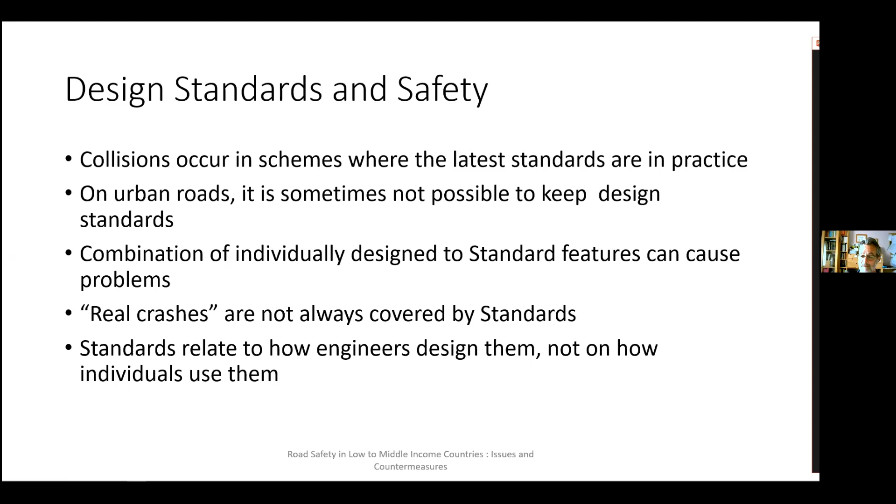Clearly, real crashes are not covered by the standards because people don't behave as the standards expect. Standards relate to how engineers design schemes, not how individuals use them. And again, audit concentrates on road user behaviour. It's done to ensure that highway schemes operate as safely as is practicable.

It would be nice to think that through safety audit, we could eliminate all collisions and all injuries. We probably could if we had an infinite budget, but we have to put in place remedies that are proportionate to the scale of the scheme being implemented, to minimize collision numbers and severity, considering the safety of all road users. And typically for new highway schemes that concentrate on improving the efficiency of vehicle movement, the majority of audit recommendations inevitably deal with non-motorized users and may be quite minor within the overall scope of the scheme.

The element that's often forgotten is that it is a circular process. Auditors learn from existing collision information what are the likely circumstances to cause collisions within existing designs. They look at new designs to say, can we improve that situation by making minor changes within the design?

Feed that back to the designers and the construction and maintenance staff so that we improve the quality of designs. Auditors are not there to criticize schemes, they're there to improve and assist designers, construction staff and maintenance staff in providing a safer and better road network.

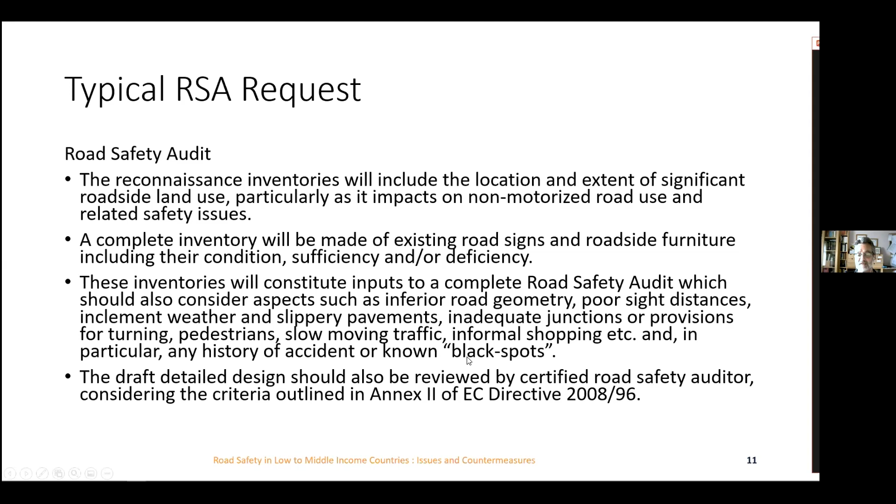Here's a typical road safety audit request included in an internationally funded major road scheme that looks at reconnaissance inventories, inventories of existing road signs, and various other elements to do with traffic movement. The only part of that which relates to undertaking an audit are those last two lines. The rest of this is information that the auditor needs supplied, not that the auditor goes and finds.

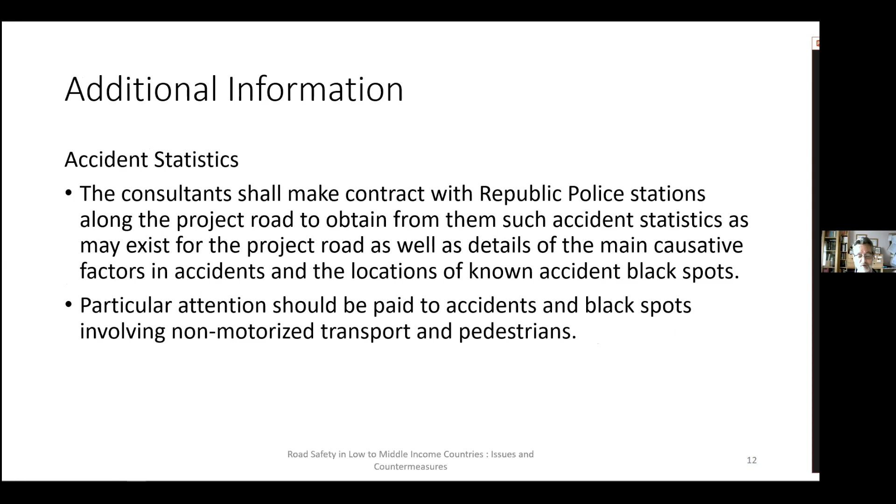Additional information refers to accident statistics, but these days they're crash and casualty statistics, so that they know the pattern of collisions happening on the existing network that the scheme will potentially address. A key element for auditors are the drawings, and inevitably the drawings are not sufficient. They give the core detail of what the scheme is going to improve, not necessarily the context of where the scheme is and what it needs to deliver.

How this road interacts with the surrounding area, where the local settlements are, where bus stops and pedestrian movements are, where schools are - that will have a major impact on road safety of all users in this area. That information needs to be provided to the auditor so that they can produce a comprehensive and detailed report that gives a brief description of the proposed scheme and the information.

Importantly, it identifies the stage of audit and the team membership. Was it detailed design? Was it preliminary design? Was it post-opening? The team members looked comprehensively at all the elements that were required, together with others who may have been present. Members of the design team can potentially make a contribution, together with the police.

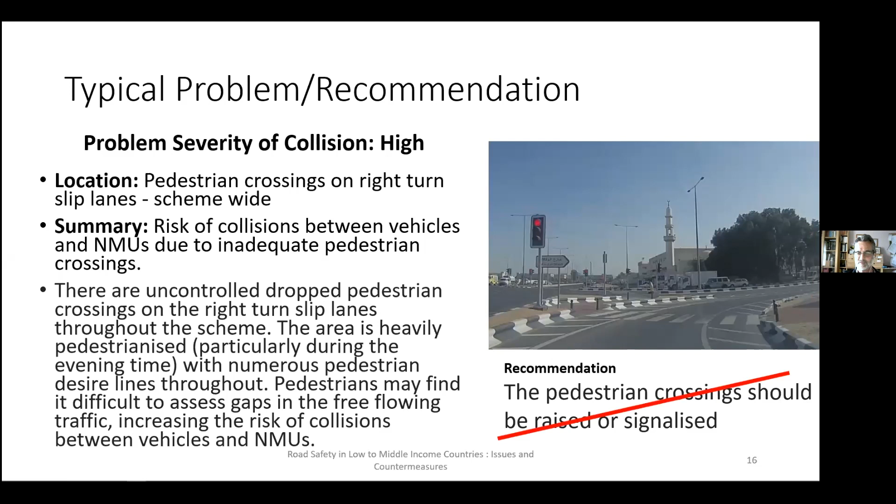Two issues with that. It's not one solution, it's two, and both solutions are design solutions. The key aspect here is the speed of approach and the likely conflict with pedestrians. The audit recommendation should be that the uncontrolled crossings be amended to provide a safe crossing opportunity for pedestrians.

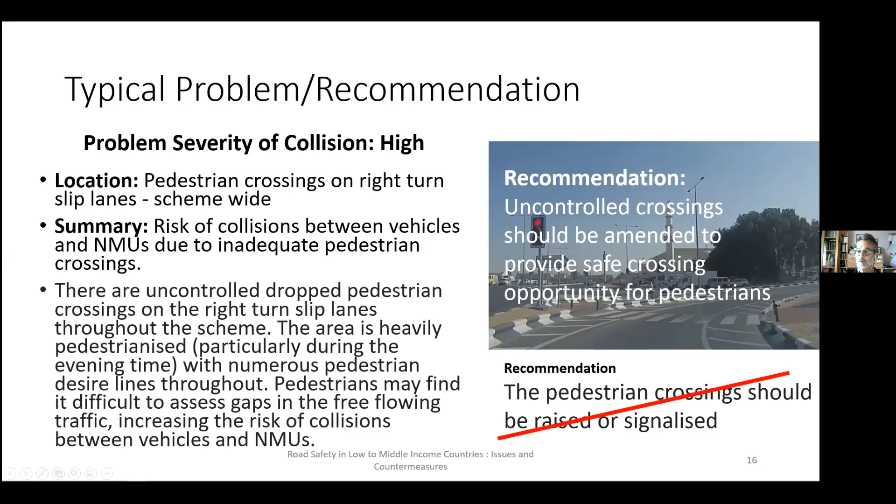Taking into account the speed of vehicles and the difficulty in assessing gaps in free-flowing traffic. How that is achieved is the designer's responsibility. The auditor merely points out this is an area of concern that needs to be looked at in detail in the design.

Once the recommendations have been produced, the design team and the client do not have to accept them. I'm quite happy for a designer or a client to say no, we're not going to do that, for whatever reason. Auditors only look at safety. They don't look at environmental considerations, scheme cost, land take, all the other things that the designer has to look at. If the ultimate decision is we can't do it because it will cost too much, that's fine.

But bear in mind that decision is signed off by the design team and by the road authority. The chairman or director of the road authority puts his signature on it and says it costs too much to save a life here. Now, I fully understand why they don't want to do that, but that's absolutely fine.

All the audit process is doing is identifying these situations and saying it is up to you to deal with it. How you deal with it is your decision, but it needs to be recorded and made public because it's your responsibility.

Auditors have the easy job. They have no responsibility ultimately.

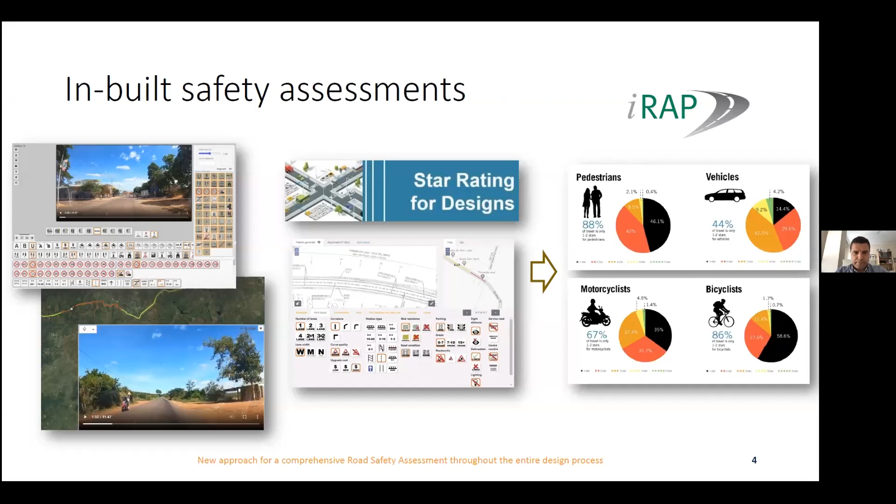But we don't only have these procedures. We have other elements or tools that we can use to improve the safety of a road. For example, we also have an important source of information from the road users' perception. It is really, really interesting to understand how road users interpret and understand the safety level of a road.

We can try to collect this information because it could be really useful, for example, to measure the level of road safety knowledge that road users have, and to understand their attitude and behavior, even if we can also make surveys or field observations. But asking them directly is also a really good way to build an important base of information that we can use later to define the best countermeasures, or before that, to understand which are the high risk sections and which are the main risks they are facing.

So according to this, it is really important to use this extra procedure in order to take these elements into consideration in our usual procedures and tools, like road safety audits or inspections. These opinions from road users will be really useful in order to translate them into engineering safety measures and into the design we are preparing.

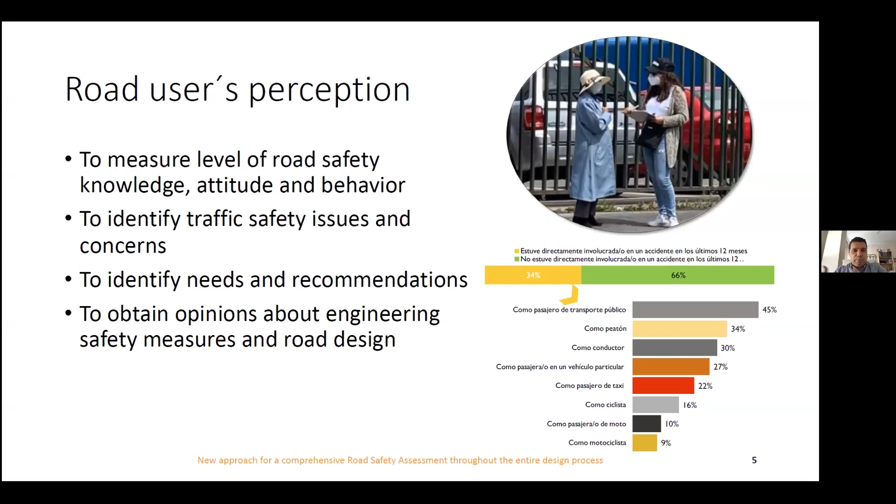But apart from that, we have other aspects where we can try to influence safety from the very beginning, and also in the last part before construction of a road. For example, we can make revisions of road design manuals and guidelines in order to upgrade them, taking into consideration different elements according to the new road safety approach, which now moves along the safe system—considering how to manage speeds and how to use traffic calming measures. With all these elements, we can improve and upgrade road design manuals, and then design roads with a better safety approach.

Apart from that, we can also make a revision of the technical standards. I know this is not exactly part of the road design procedure, but it could be a kind of base—if we have these upgraded manuals considering the safety point of view, it could be easier to get better road designs.

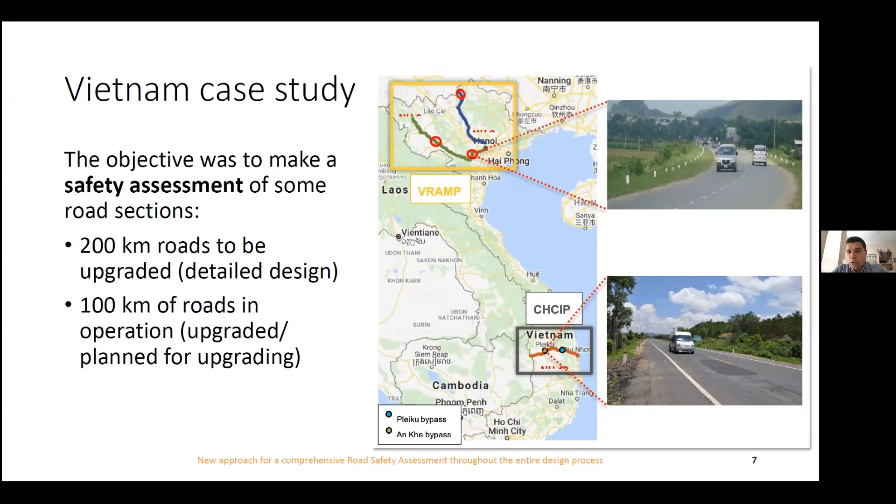The total length is around 300 kilometers, of which around 200 will be upgraded recently with World Bank financing. The rest of the road sections are already upgraded or will be planned for upgrading.

Next slide, please. So what we have done for this wide road safety assessment: here you have all the stages that we have followed for this assessment. We started with a gap analysis.

Gap analysis in the sense that when we arrived at this project, the government was preparing the detailed design of the different road sections in this National Highway 19.

But prior to the detailed design, there were different road safety assessments. There was, for example, an iRAP baseline, an assessment that shows the results of a baseline survey and provides information on the location of high-risk sites and some cost-effective countermeasures that can be considered later on. There were also some star rating reports that show the assessment of results based on the preliminary design, and provided advice on further treatments that could be considered to achieve a better level of safety.

There were also road safety audit reports on the preliminary design. So what we have done is take all this information, analyze it, and make a comparison of what they suggest for improving road safety, and compared this with the detailed design.

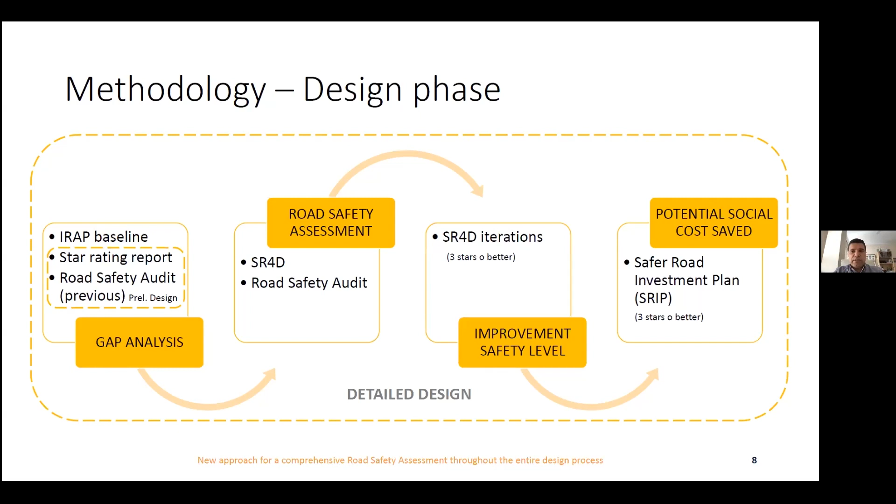Finally, with this, we achieved a specific safety level. We improved the safety level of the road considering these suggestions, these countermeasures. Then we carried out and prepared a safer road investment plan in order to understand the potential social cost that we can save with all these countermeasures that can be considered in the detailed design. Next slide, please.

As I told you, all the problems identified in the previous road safety assessment and the related recommendations suggested in the previous IRAP baseline analysis, star rating analysis, and road safety audit were revised by ourselves. For each of them, we checked if the proposed recommendations were implemented in the detailed design or not. You can see here in the upper side of the slide the comparison between the previous estimation and the previous level of safety. As you can see, we have an important percentage of red and black stars.

You can see that we jump from an important percentage of the length of road sections in color red and black, which is 1 and 2 stars, and then after considering the recommendations, we jump to 3 stars or more. You can see this for the different road users.

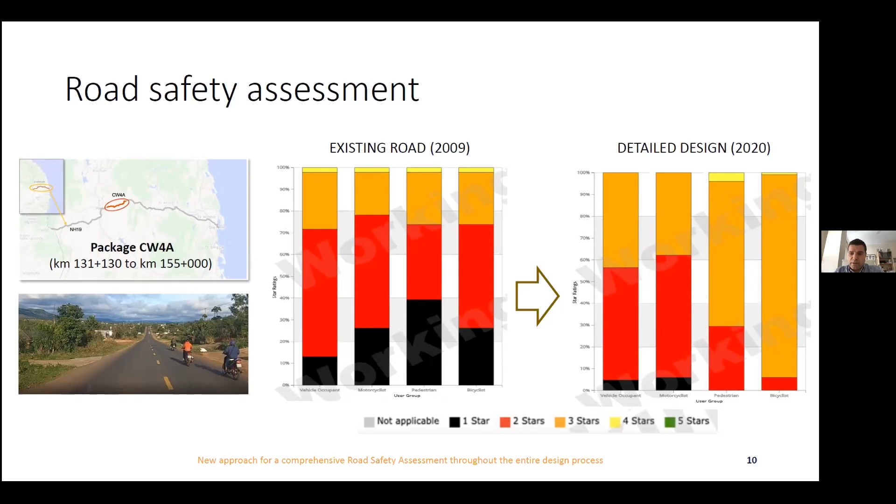According to the recommendations we will do, we will improve them for the detailed design. You can see that the existing road in 2009 has a lot of length of road with 1 and 2 stars, and then for the detailed design it has been improved. But on the right side you can see that the detailed design also has some important length of road sections with 1 and 2 stars, even though there is an increase.

According to this, as I mentioned before, we have made different iterations considering this tool, Star Rating for Design, in order to understand how to improve the safety of the road. We started with the baseline survey, then carried out a first iteration considering what we have in the preliminary design. According to this, we achieved a specific level of safety.

After that, we ran another iteration, a second iteration, considering the suggestions and countermeasures we suggested in the road safety audit. According to this, the detailed design has to be improved and upgraded to take these recommendations into consideration. Then with this, we will carry out a third iteration in order to achieve a specific or potential safety level that, as you know, according to the UN, we have to achieve at least 3 or more stars.

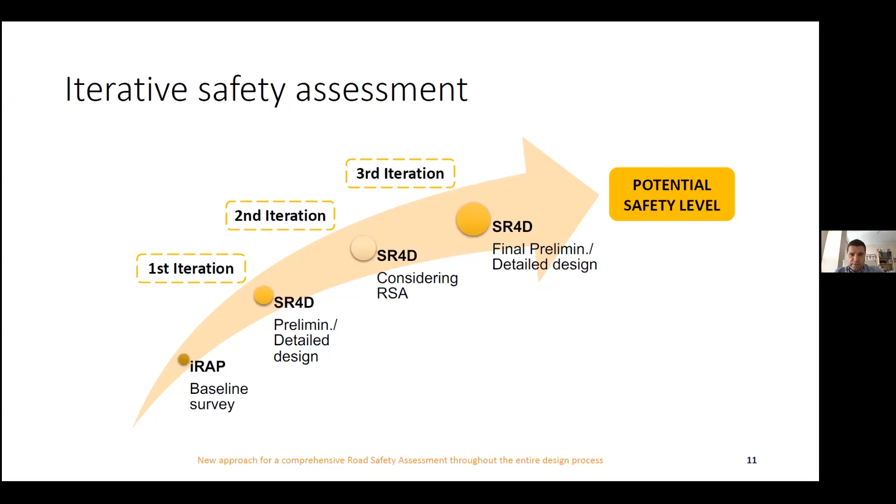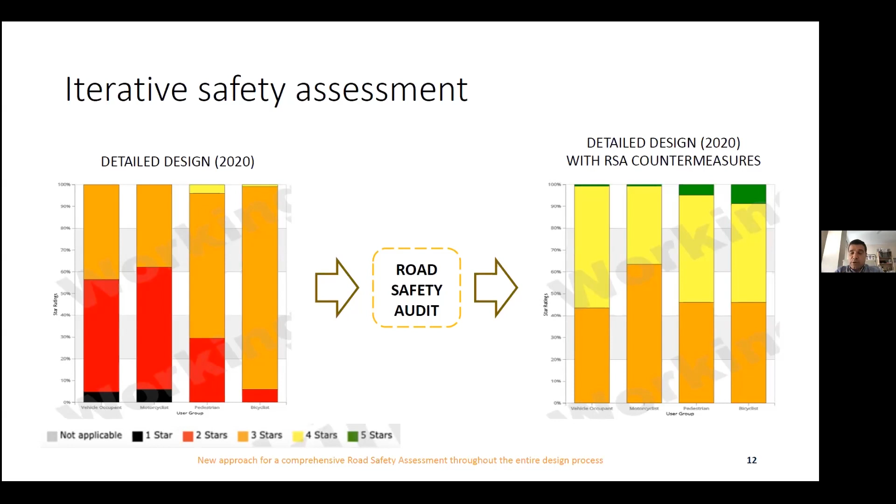This is something theoretical. In the end, these countermeasures and recommendations we give in the road safety audit have to be considered and implemented in the detailed design, and then in reality. So this is something we have to consider all along the design process. This is also really important: a road safety specialist, a road safety auditor, should be present at the different stages of the road design.

The application of the IRAP methodology in this case, along the various project phases, has made it possible to quantify the possible improvements in terms of star rating - in terms of improving road safety for all types of road users.

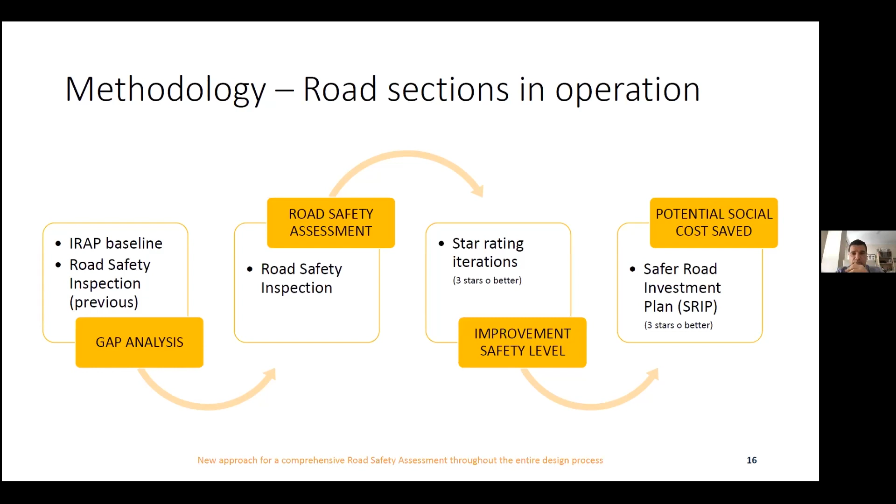Apart from that, we will also carry out a citizen engagement study. This study has been implemented, or will be implemented, in order to understand the perception of road users. These are the key elements we have considered. The approach is a cross-sectional approach where we have mixed quantitative and qualitative methodology.

So we implemented questionnaire surveys, we carried out in-depth interviews, and we organized focus group discussions. The locations were road sections with 1-2 stars for the four road users, crowded areas, and high-risk crossings in different types of environments.

The main participants were, of course, road users and other community members, but also local police, local transportation staff, and also school principals and school staff. This is really important because defining the main key stakeholders to focus on is key for this. And then, as I told you before, the tools we considered were questionnaires, interviews, and focus groups. Next slide, please.

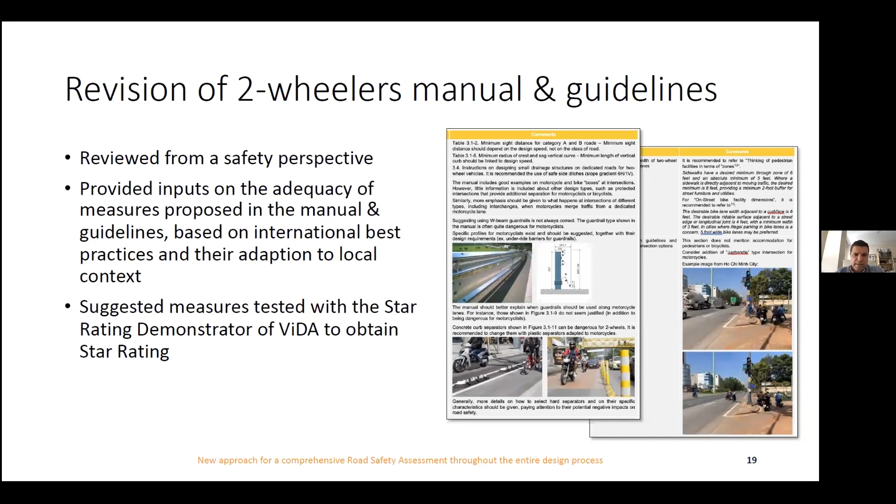Next slide, please. And that's all. Thank you very much.

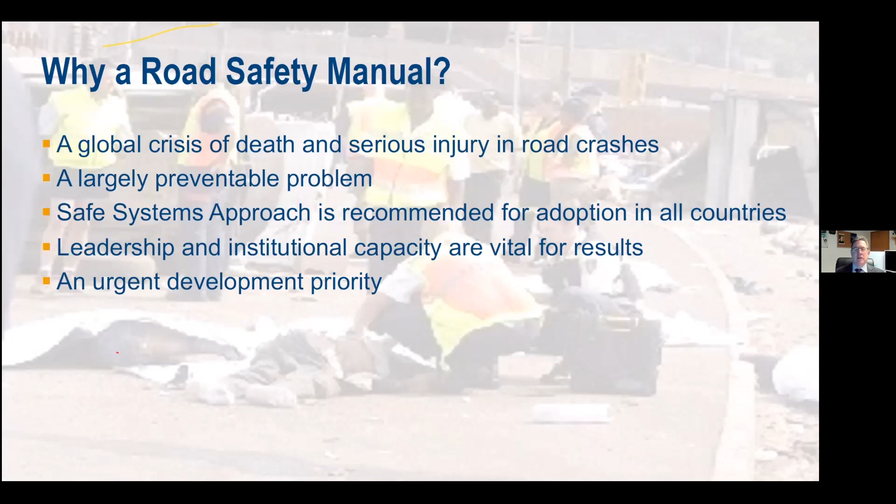So as I suggested, the road safety manual is based on the safe system approach. It shifts from crash prevention in general towards preventing deaths and injuries. What is it we can do proactively to address road safety?

It directly addresses the needs of vulnerable road users. In many countries, road users are treated differently. The vehicle may be predominant, so systems are built for the vehicle. But there are other road users, bicyclists, motorcyclists, and pedestrians out on the system. We need to address and adjust for those road users as we see them out on the road system.

It encourages safety to be designed into developing networks rather than as an afterthought. It is best to do things right from the beginning rather than wait to see how a road operates and then adjust for those issues. That's not going to work. That's the value of road safety audits. That's the value of being proactive in road safety.

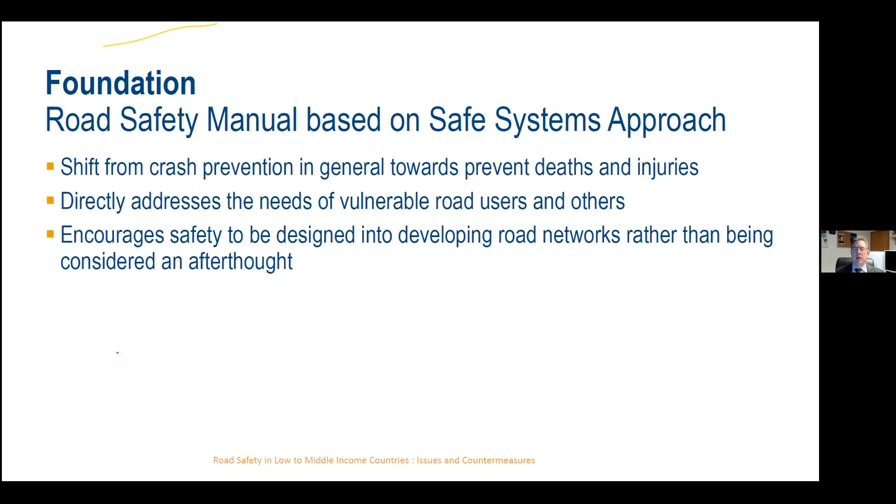The PIARC online manual is free of charge, and that's very important, I think, to many of us. There's 3 main parts, 12 chapters in total. The case studies and links provide detailed technical information and other references, so there's a lot of information. We've identified information we think is relevant and provide links to those. Each chapter and part can be downloaded and printed, and it's aligned with the pillars for the road safety decade of action.

Pillar 1, road safety management. Pillar 2, safer roads and mobility. And Pillar 3, safer road users.

The chapter organization is there for the reader. There's key messages for managers. To understand road safety, the practitioner often understands what they're doing, but management may not, so we have messages for management to assist. There are key principles for each topic, the specific things you need to know about each topic area, and discussion to explain those key principles.

There are case studies. We really worked hard last time, and we're continuing to work hard to provide case studies that show you how and why and where to apply road safety principles, along with links to technical material and other references. There's a lot of information in the document, and we try to make it accessible to you wherever it exists.

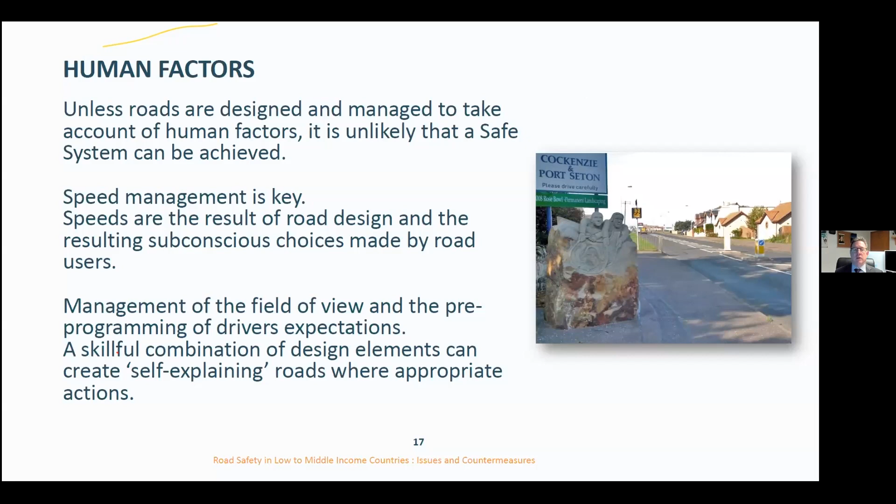As I suggested, infrastructure is a critical part of the road safety question. What are the improvements that we can do that can contribute substantially? So we've talked about countermeasures. What are those infrastructure countermeasures that we can put into place that are going to reduce fatal and serious crashes?

Standards, guidelines, and tools: how we go about understanding the system is very important as well, to be able to network screen, to select safety projects, to select the best safety projects to go out in priority order to determine what needs to be done on the road facility.

And we can do this in terms of demonstration projects. We're not always going to be able to do everything all at once. We can go out, make changes, see how those changes work, and then if they work well, implement them on a larger scale.

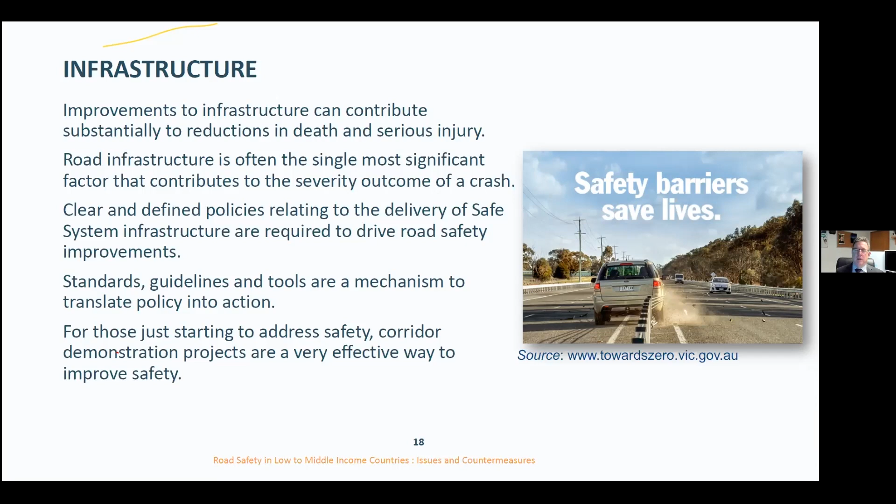Intervention, selection, and prioritization. I put this slide in there because it's critically important. If you're going to be most effective in road safety, you have to select the right projects. You have to be able to understand and address the risk. That's why we use tools like iRAP and other tools, for instance the Highway Safety Manual in the US, and many other tools in different countries where they're looking at road safety, trying to address that from proactive tools and going out there and making modifications.

Interventions are there to address contributing factors. I can't overemphasize contributing factors. Go out, understand what is happening, and address those contributing factors to be most effective. Detailed information is available on the intervention and use, including those for low and middle income countries. And that is one effort that today the TC3.1 is undertaking: proven countermeasures. We want to get that information out to you to help you understand what we're seeing as effective.

Economic assessment is also very important, being able again to prioritize projects in priority order to get the best return on investment for the funds that we are spending. Next slide.

Once we've chosen to do a project, we need to monitor, analyze, and evaluate those projects. Again, the idea is that what we're trying to achieve is continued improvement overall. Monitoring, seeing what's happening, analyzing to understand the individual parts, and evaluating and comparing what you're doing from location to location, so that you can improve those systems.

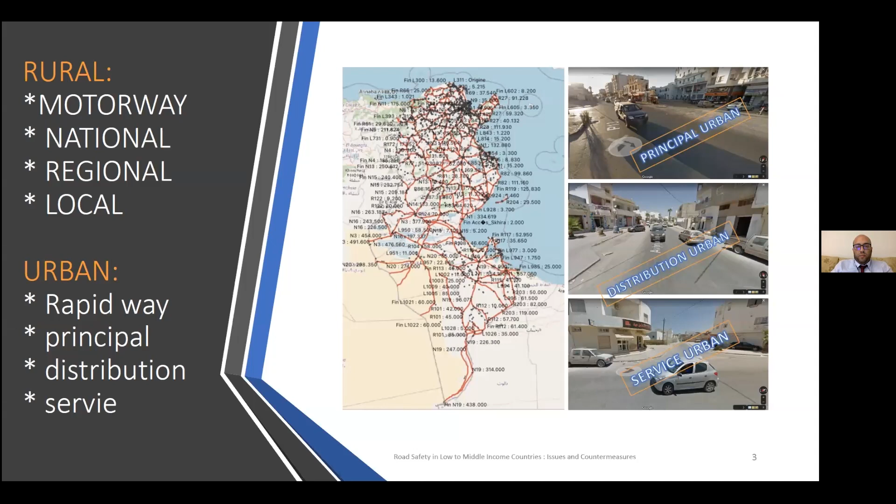On the next slide, I've shown the distribution of crashes over the Tunisian national roads. As part of the TunRAP project we were discussing yesterday, we were able to map two key elements from these crash maps. So on the next slide, you have two maps.

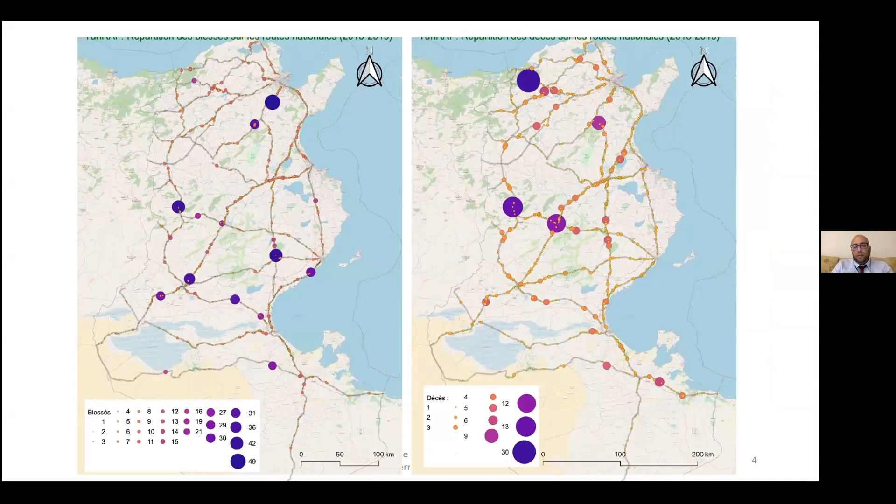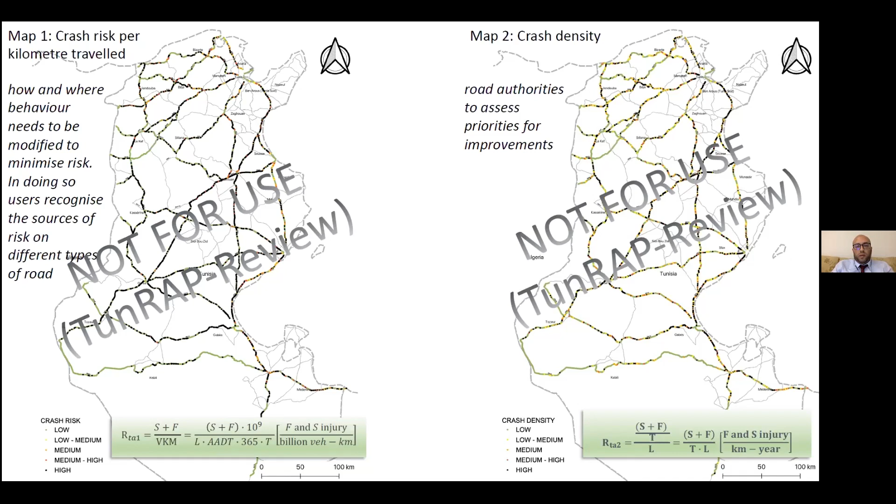In Tunisia, as well as Northern and Western Africa, road design is based on a very rich archive of guidelines—mainly French guides, used across most countries in this part of the continent. I've chosen the most important ones for road design, intersections, roundabouts, interchanges, and bypasses. Behind these documents are hundreds of other guides about road safety, urban area roads, roadsides, safety barriers, and so on.

When reading these technical design guides, you'll see there's a huge amount of recommendations—so much that any designer, even with long and strong experience, wouldn't be able to answer all the questions or account for all the safety aspects, especially when dealing with many projects at the same time. In fact, as shown on the next slide, we definitely need checklists.

We use, in Tunisia and in most of our projects, the checklist of the French Service of Technical Studies for Road and Motorways. We also started using the PIARC checklists, which are quite rich and contain many recommendations to check the design and be sure we're accounting for all safety issues, starting from preliminary design, detailed design, and construction design. There you'll find more than 200 questions to account for road safety in your project, which is impossible to keep in mind and which aren't systematically counted in commercial design software. So there's really no other way to check the design apart from these tools and checklists.

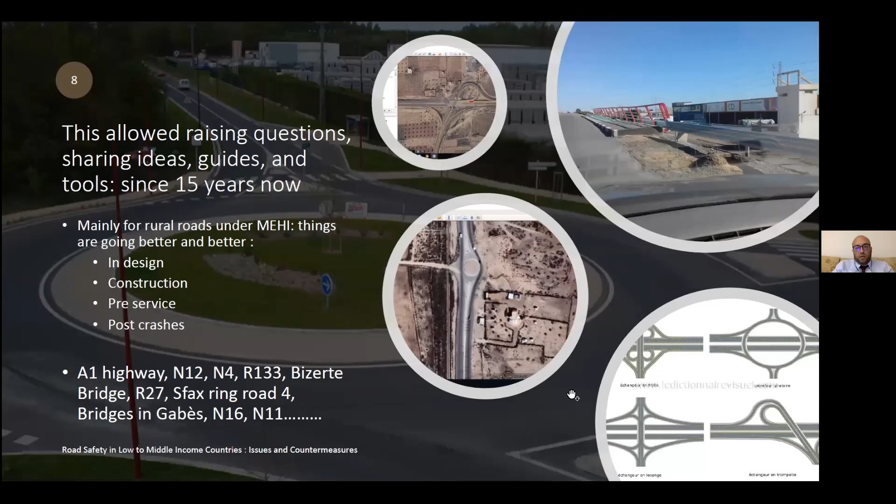So the designer now correctly checks visibility, which wasn't accounted for in all projects before—it was only systematic for some major roads or motorways. This also allowed accounting for good visibility for overtaking, good visibility on curve entries and intersections, and ensuring these are greater than stopping distance when necessary.

Our colleagues and designers also started checking curve sequences, which wasn't systematically accounted for before—the distance between curves depending on their sign, and coordination between horizontal and vertical alignment. All of this has come into the design correctly after using these checklists, based on our experience in Tunisia over the last, say, 15 years.

They also check roundabout deflection, which wasn't systematically accounted for before. They check vehicle movements and paths on the drafts to avoid unsafe measures. They also account for vulnerable users in rapid urban ways, as well as clear zone treatment. Roadside hazards and equipment are improving, and new projects make use, for example, of European Standard 1317 to define barriers and their ends. But I think this should be adopted in all projects, not just pilot ones. This is a challenge for coming projects, especially the corridors currently in the design process.

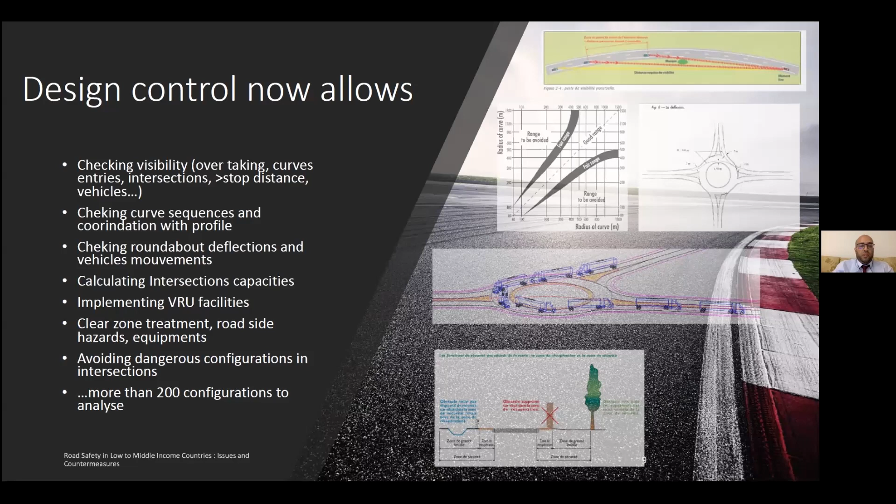Meanwhile, when we look into the crash database, we unfortunately see that over the period 2015 to 2019, fatal and serious injuries were around 11,000 on rural roads, while more than 22,000—double that—were on urban roads. So it's two-thirds on urban roads. This is a big challenge for us.

We need to focus more and more on urban areas, where there's a lack of funds and sustainable resources to account for road safety. The municipalities in charge of designing, constructing, and maintaining streets suffer from lack of experience and global leadership at the national scale. We need to revise our development plans, adopt safety engineering facilities, and convince them of their effectiveness and importance in their respective regions. We'll also need to convince them that streets must be shared with vulnerable road users, and to avoid constructing rural-style streets only for vehicles.

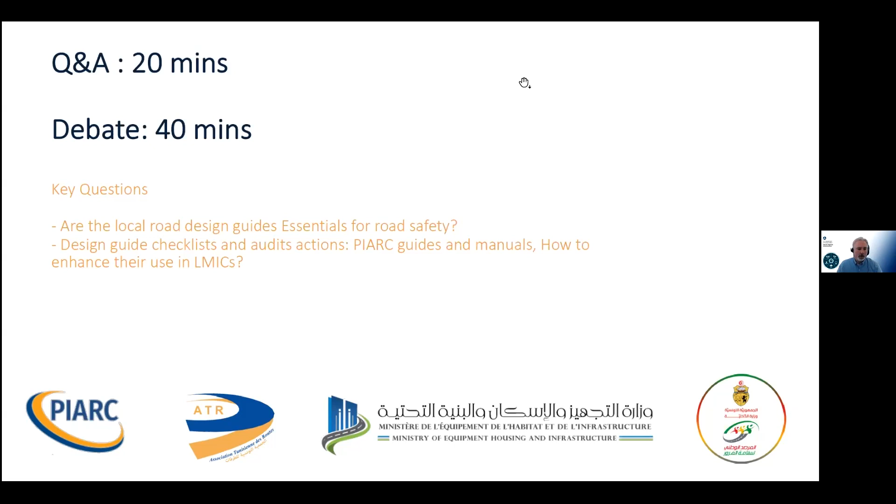The next question I would like to pose to Francisco. Francisco, this question came in from Nuria, who asks: in general, when a new road is being designed and I want to apply a safe design, is there any rule or parameter with which I can estimate the social benefits of increased safety in a monetary way? In the case of reduction of injured and deceased, I have, for example, the IRAP rule of thumb as approximately 70 times GDP per capita for a deceased. So any advice that you can give to Nuria for new road assessments?

For new road assessments, there could be two possibilities. One is that we find a greenfield road, where the road is designed in an area where there was no previous road. So this is something completely new. In that case, we just focus on the design. There is no other element we can take into consideration, just the design and the environment that we will find, in order to understand which different trips we can find in this area, in this section.

But if it is a road that is a rehabilitation or an upgrade of an existing road, then we will have some more information. It's possible to have information in terms of the road crashes that have occurred in the existing road section, and this is a really important source of information, because analysis of this can give us a lot of hints that we can use.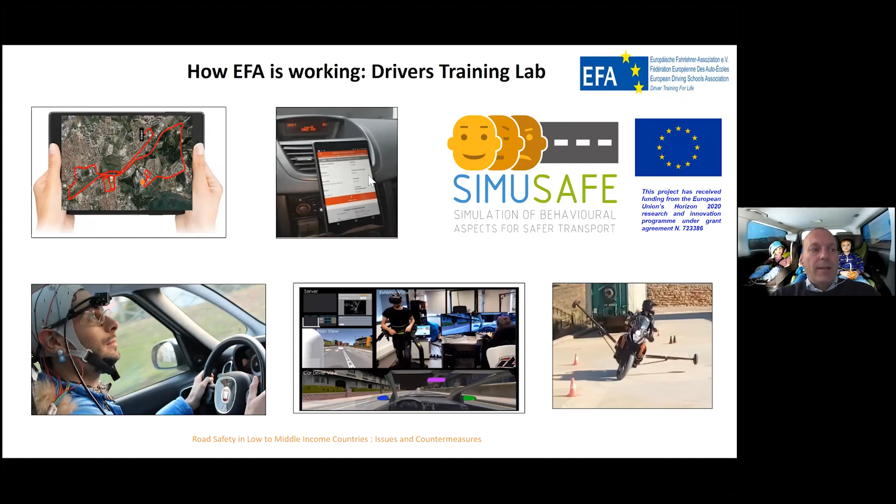So in situations where across Europe it's very complicated to reproduce all year round, we are doing lobbying activities at DG Move. DG Move is the Ministry of Transport of the European Commission, so we are working a lot there.

And we are also invited to do the UNECE road safety global events. One of the things that we are presenting and supporting, as already mentioned in our publications and in our metrics, is the need to update the training curriculum to match the market and society's needs.

For instance, we have a very high limitation because currently in some countries it's not allowed to use ADAS during the exams. This means the instructors don't use, don't buy, or disable the ADAS during training, because the students aren't interested in it, just because during the exam the candidates are not evaluated on these devices.

One of the things that we are defining is a new role as a road safety expert — a person who will be able to work as an examiner or as a driving instructor. This is based on the concept of a university, so we have a central curriculum. 75% of the study of the training course that the person has to do is the same, whether he wants to become a driving instructor or an examiner. The remaining 25% will be specific topics on becoming a driving instructor or becoming an examiner.

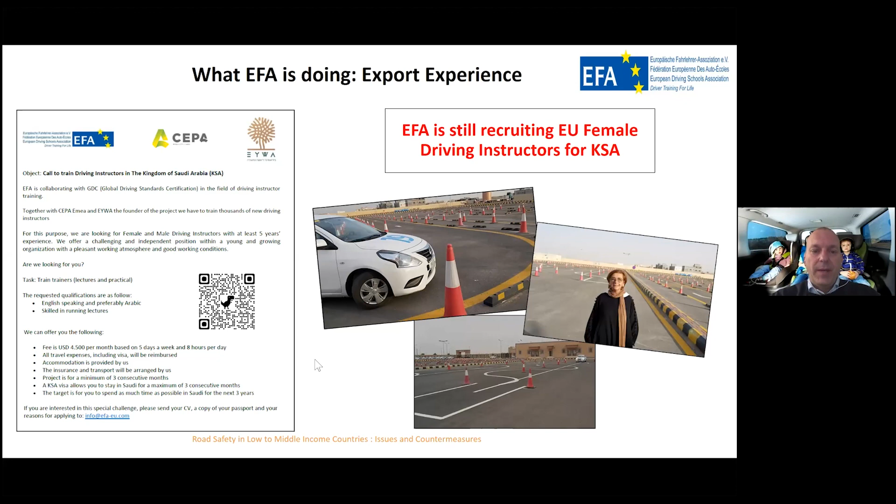A few weeks ago, we started a new cooperation with the Kenyan Boda Boda Association. Boda Boda are motorcyclists, riders, more than 1 million people working on the road delivering goods and passengers, and we would like to understand how we can participate and share knowledge and improve our skills together. We will update you soon. I guess before the end of the year we will collect interesting results.

We are starting as well some cooperation in Africa with Nigeria and Togo. So summarizing, we believe that technology is profoundly changing the way we work, and we are committed to ensuring that the laws align with the needs of society and the economic market, respecting the environment.

In Europe, around 80% of drivers obtained their license at least 20 years ago. The roads have changed, the vehicles are changing, only the driver struggles to change. Quality private training must accompany this challenge. Technology can help us improve the quality of training, especially in low and middle income countries where limited economic resources have been a problem for the dissemination of quality driving training.

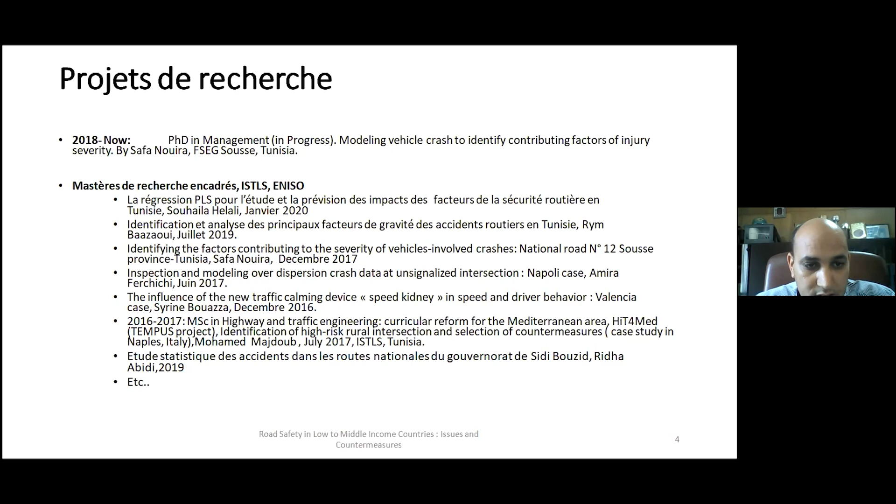Another project: identification of high-risk rural intersections and selection of countermeasures. This is in Naples, Italy, and several other research projects.

Now, the objectives of the research work are to identify black spots in accidents, to undertake a diagnosis and inspection of black spots on the route network, identify the main factors of serious road accidents in Tunisia, specify the correlations amongst them, foresee the impact of the main factors on the frequency and seriousness of accidents in Tunisia, and provide countermeasures to improve road safety.

The risk factors: human factors include gender, driver's age, speed, use of alcohol, driver's experience, etc. Then vehicle risk factors: the vehicle age, the type of vehicle, the number of vehicles involved in the crash.

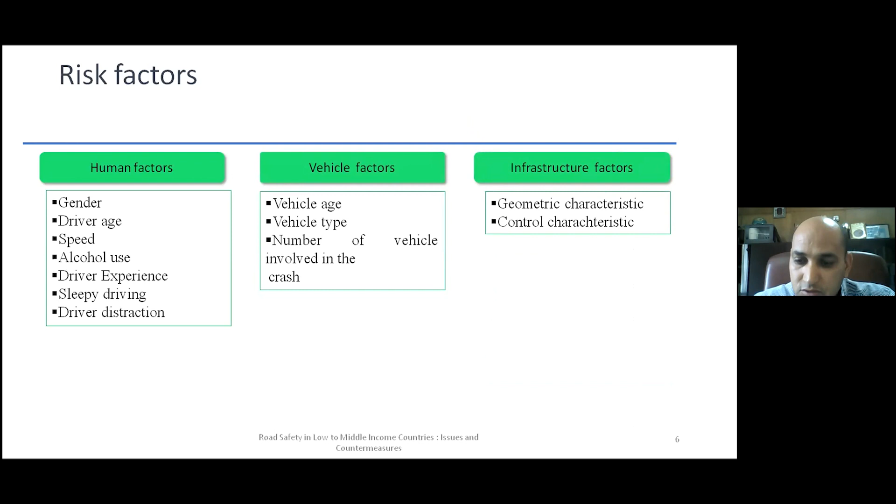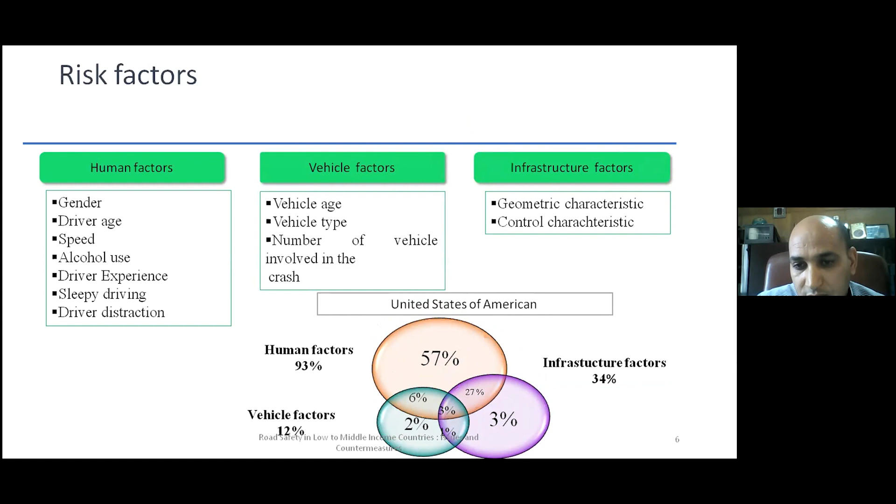We also have infrastructure factors, which are geometric characteristics and control characteristics. For instance, in the United States, the main factors in accidents are human factors, infrastructure factors, and vehicle factors. Essentially, it's the same picture in different countries.

Environmental factors include weather conditions, the season, road surface condition, and lighting/street lighting conditions. Then temporal factors: time of day, as well as the day of the week, etc.

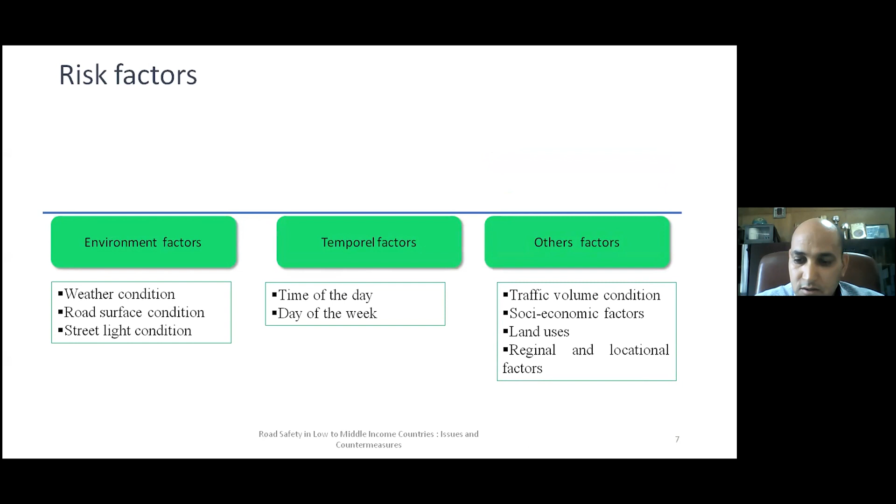Other factors include socioeconomic factors, traffic volume conditions, regional factors and local factors, etc.

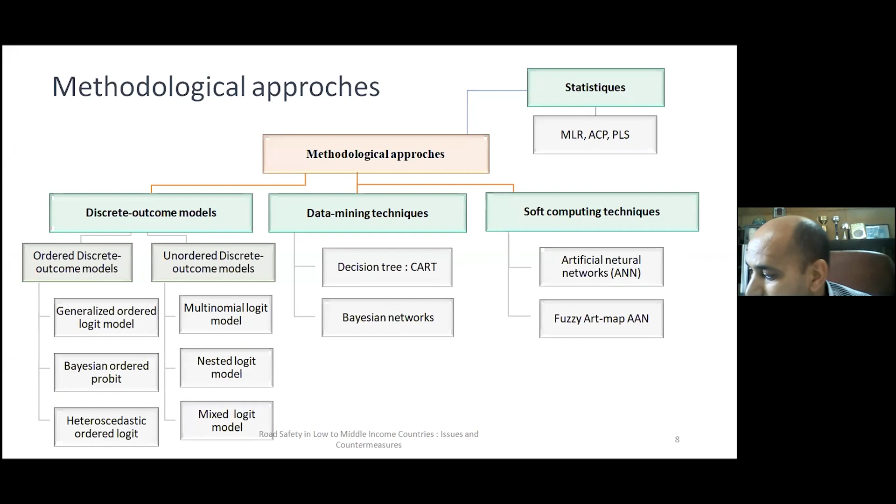The methods used are essentially the methods that you have before you: soft computing methods, and also statistical methods such as multilinear regression, for instance. This is one of the main components, either PLS or regression, etc.

I would begin with the first project: a PLS regression for the study and prediction of the impacts of factors on Tunisian road safety. This is to identify the main factors of road safety in Tunisia and to foresee the impact of these factors on frequency and seriousness of accidents in Tunisia.

This was undertaken in 2019. For instance, the statistics on accidents over 8 years from 2010 to 2017 show the major factors are human factors: driver's distraction representing 50%, speed 46%, and other linked factors 33%. Among factors related to the vehicle: 33% light vehicles, 18% motorcycles, 14% light trucks, and 20% pedestrians.

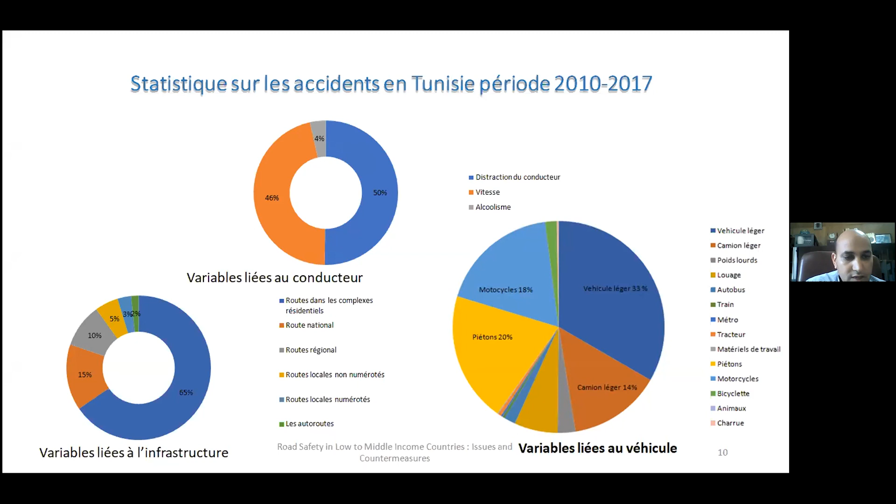This is mainly 65%, and this is 15% and 10% for the local roads. This is the variables, the classification of variables in the software used in the PLS regression method.

We also use the impact of different factors: global factors, the human factor, the vehicle factor, the road factor, etc. There is a very significant relationship with the number of accidents, the Y response, which is very well explained by the different factors.

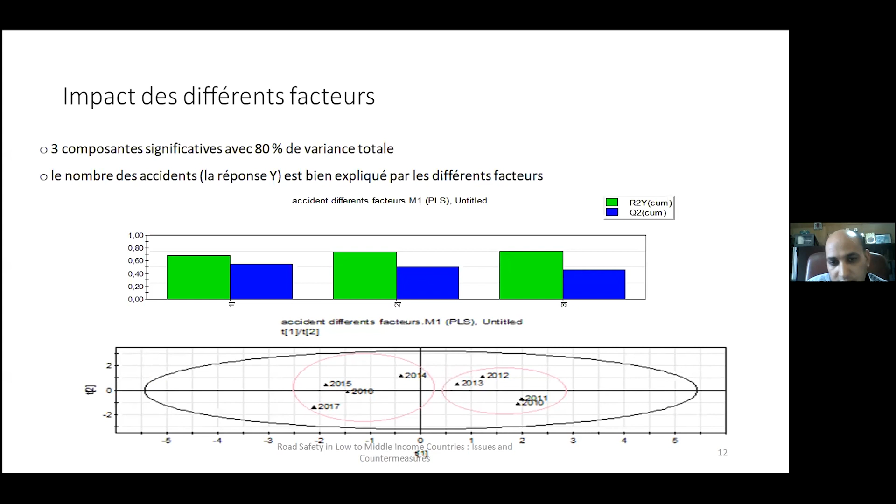It's very similar in 2012, 2013, and from 2015 to 2017, you can see them. We are showing the main factors: the passenger factor, the passenger vehicle, the factor vehicles, and this also has to do with the list in the police database.

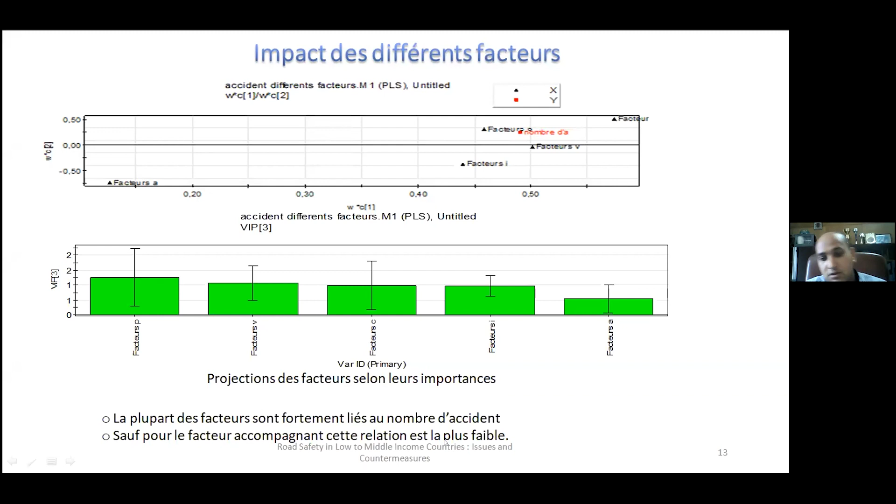Sometimes the police tend to eliminate the cause of the accident, and the majority of the factors are linked to the number of accidents, except for that. For prevention of the number of accidents, you see the number of passengers, vehicles, and the driver.

There is a certain agreement, a concurrence between these two, since between 2010 and 2012 there was a big difference in the number of accidents. This is because of the prevention actions.

This is what we have to do: include the factor of economic growth. This is economic, demographic, etc.

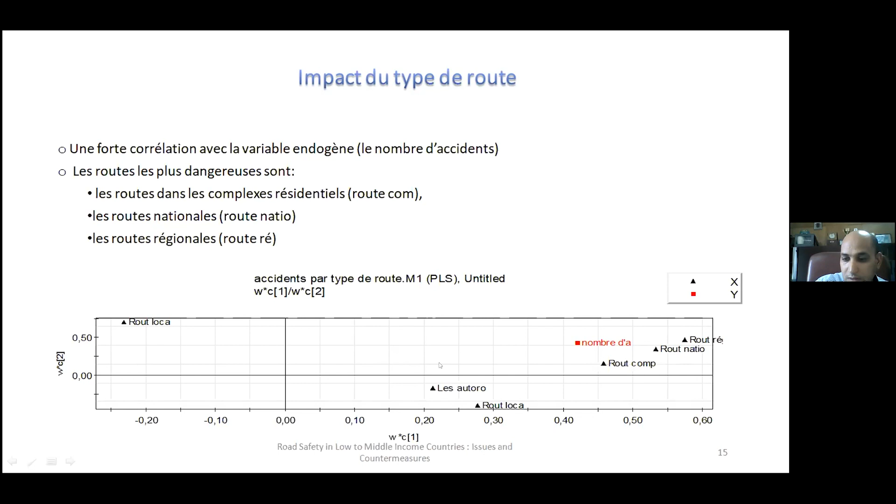We saw what the impact of the type of road was. You see the residential roads, the national roads, and the regional roads. There is a big relationship with the variables, as you can see in this graph.

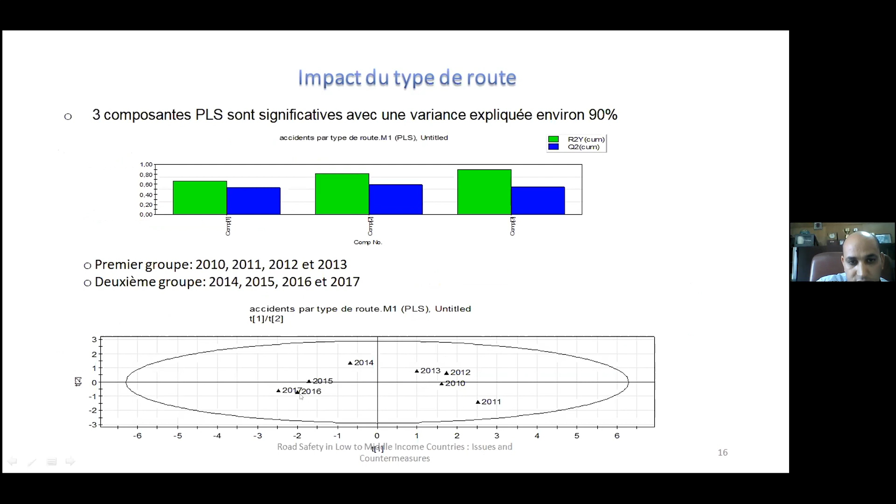The same applies in the years 2014 to 2017; we have the same joining of the figures here. Agglomeration.

This is present in the kind of vehicle. You see the light vehicles, the buses, the light buses or trucks, and the heavy vehicles.

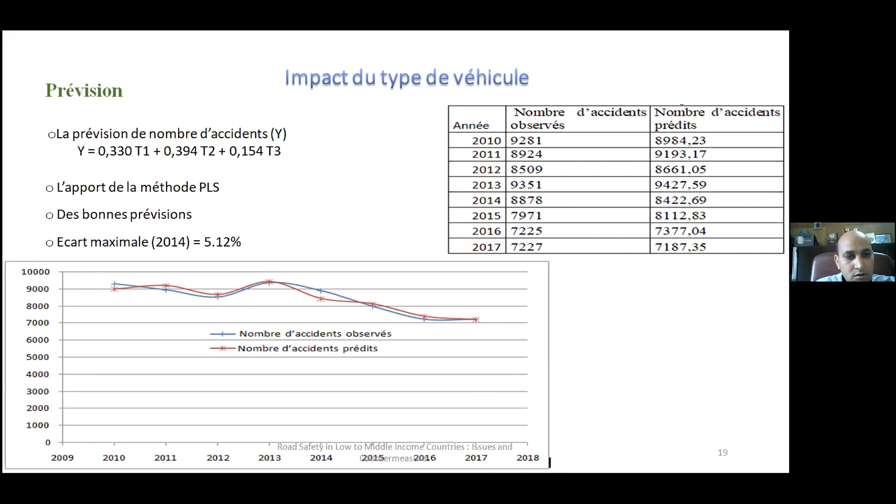This is a prediction measure, and this is how we measure it. We will look into the different impact of the month, the week, or the time of day in which the death occurred. We want to look at the efficiency of these measures by examining the different factors.

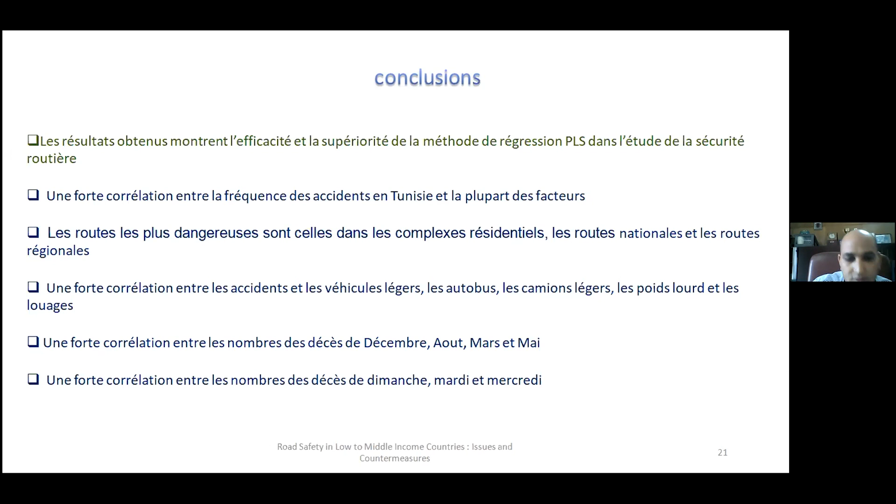The roads are more dangerous in residential areas, then national roads, then regional roads. There is a certain correlation in the months of December, August, March, and May. The number of deaths is higher during the weekend and on Wednesday.

So what would be our recommendations? We have to improve the infrastructure. We have to improve the quality of the road surface in relation to the amount of traffic. We have to improve the signals on the roads that are most dangerous.

The drivers and passengers in the vehicles need to use the safety belt, the seat belt. That's the second part of this project.

Do I have to continue in French? If you want to speak in English, you change your channel. You cannot change the language when we are sharing the screen. No, I will continue in French. If you want, we can wait five minutes.

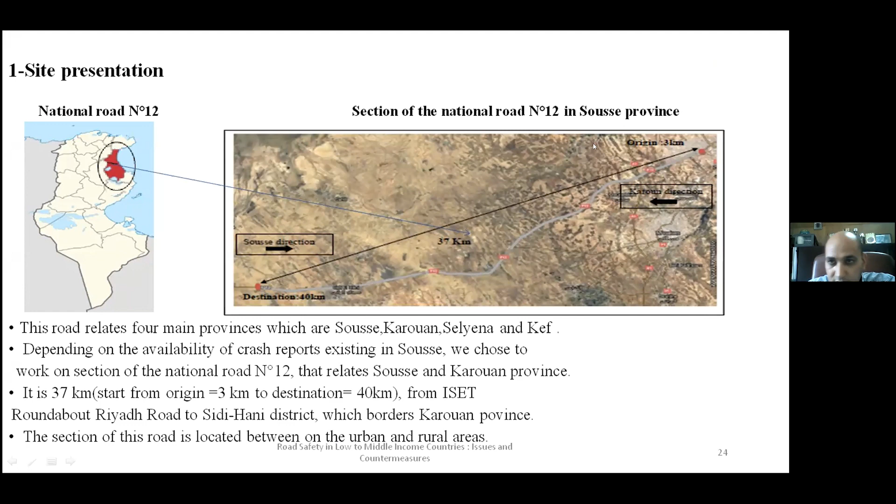The road, this is in this part of the Sousse province. It is urban, and the other part is in this area, rural.

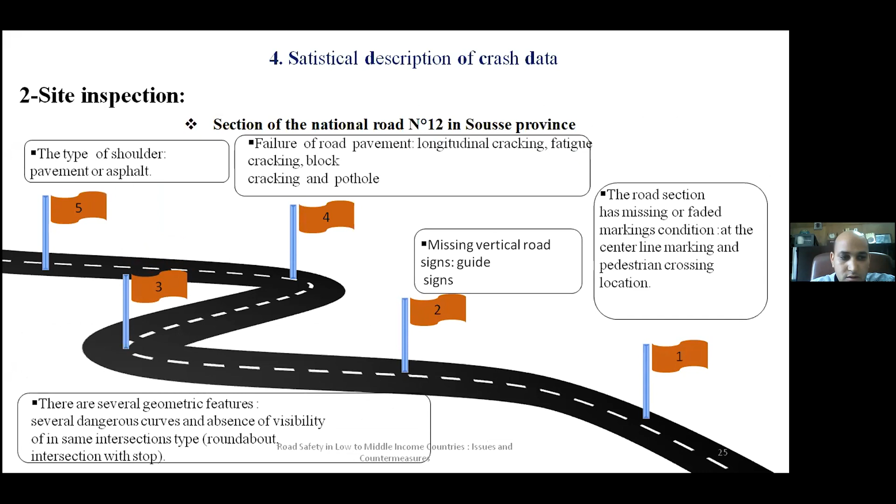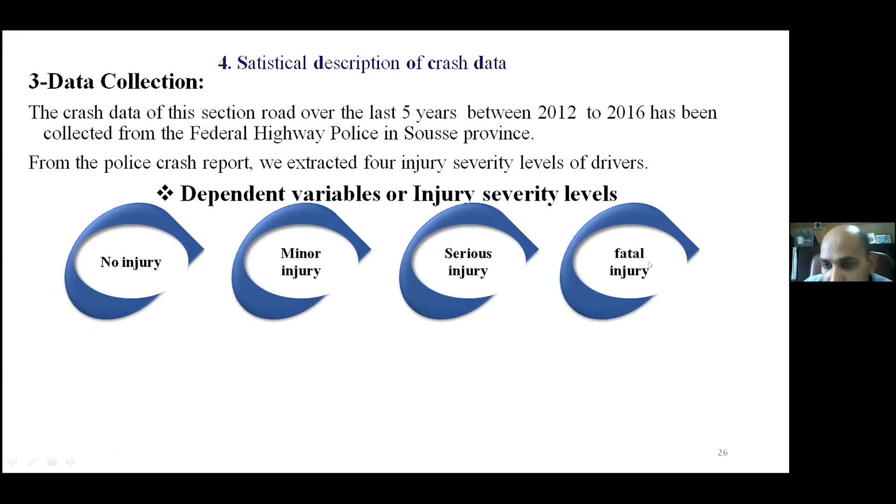And then we have the different factors for severity: minor injury, no injury, serious injury, and fatal injury.

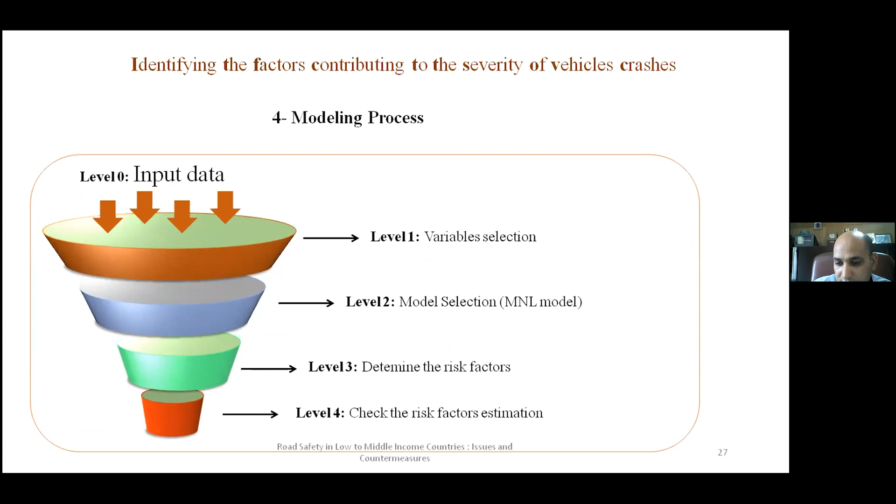This is the method with four levels or stages: variable selection, model selection, the MNL model, and then determination of the risk factors, to have a checklist of these determining factors. These are the main risk factors.

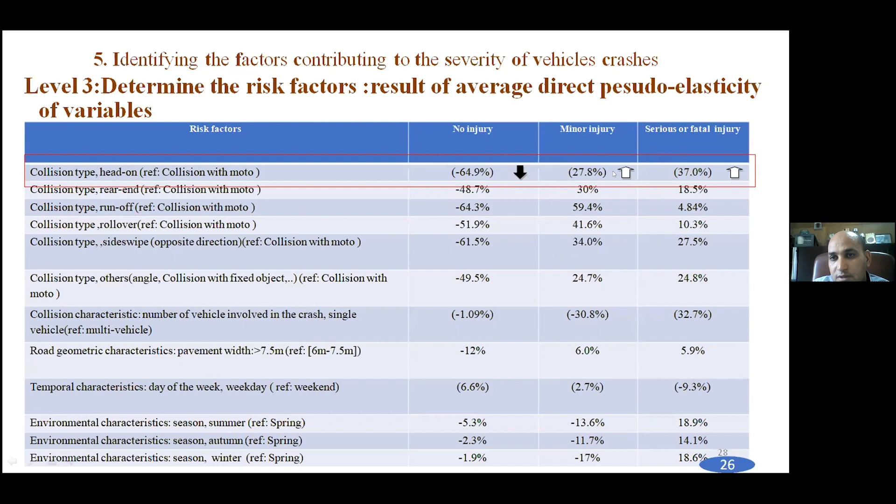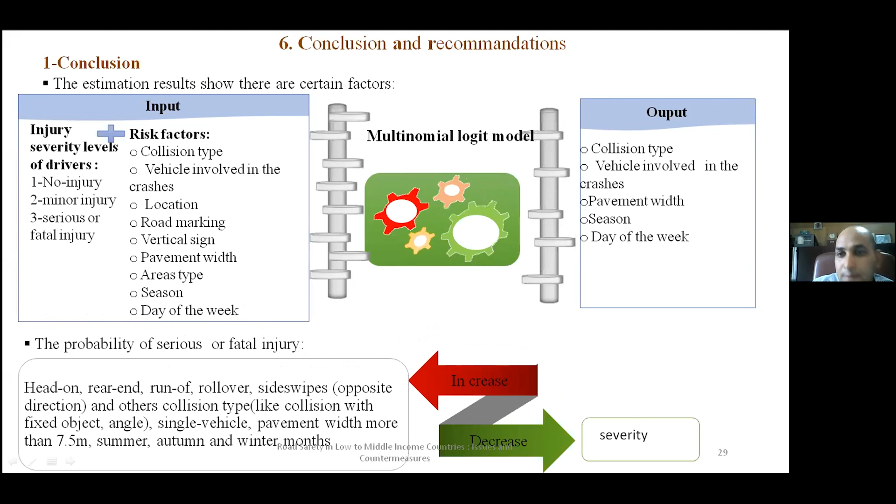As a conclusion, from the different checklists, we can choose the factors that have had a serious impact. We can have a short list of these factors as a conclusion.

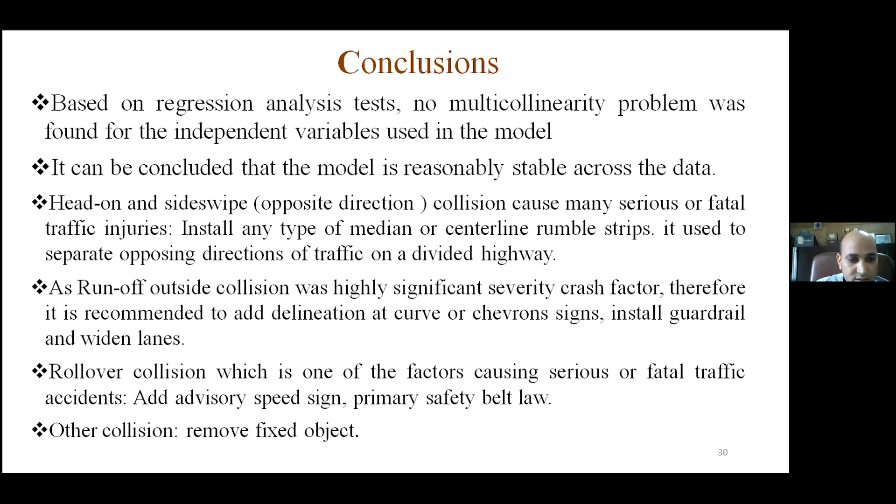This is based on regression analysis tests, with no multi-collinearity problem. This depends on the type of collision, and then we can see the severity of the collision.

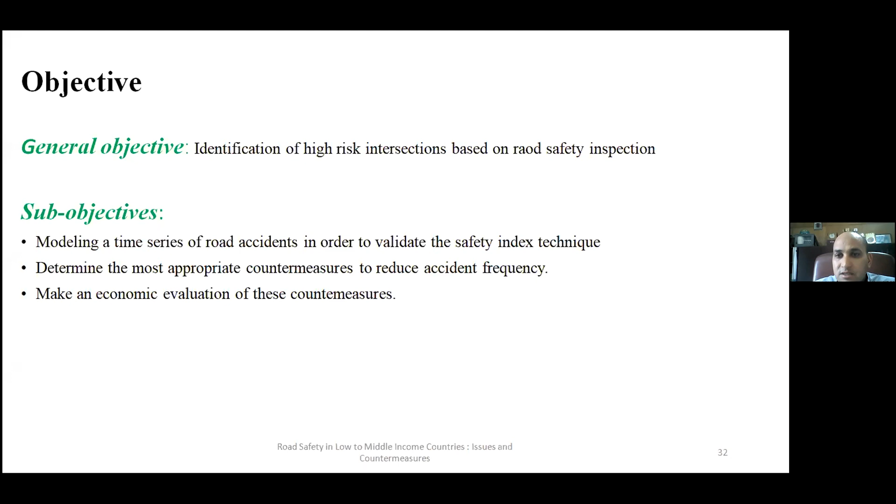Based on the inspection of road safety.

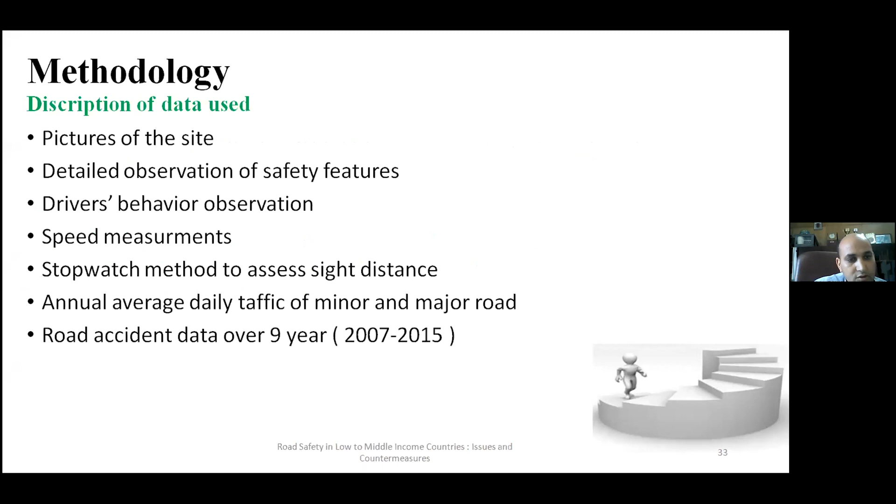This is the methodology: pictures of the site, detailed observation of safety features, driver's behavior observation, etc.

The methodology or tools used include GPS, and we identified the high-risk intersections in Napoli.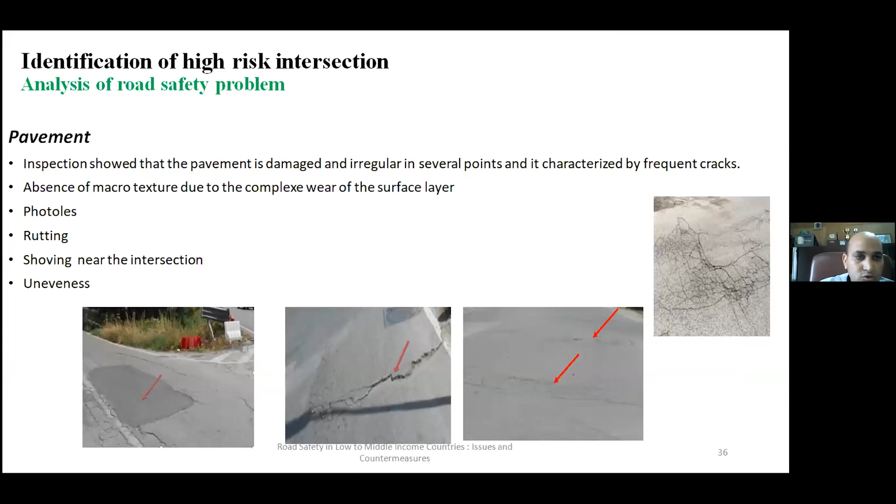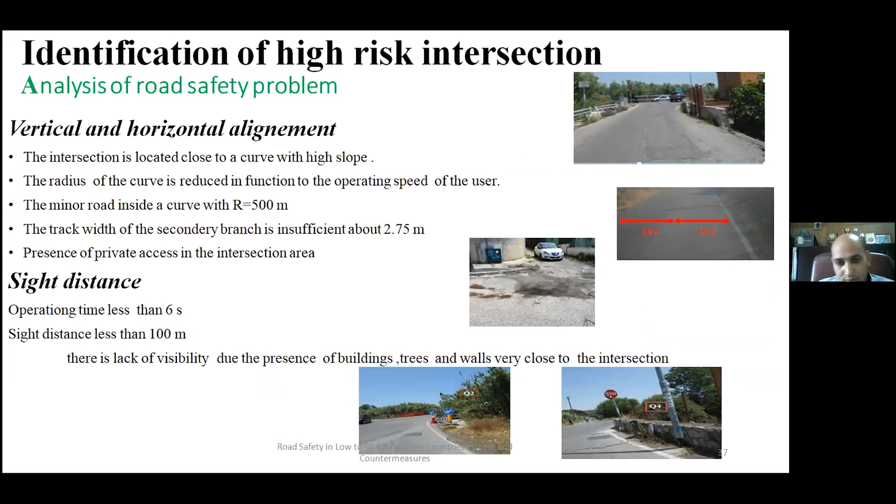This is the identification of high-risk intersections: vertical and horizontal alignment, the sight distance, the signs, horizontal and vertical signs, and all these factors.

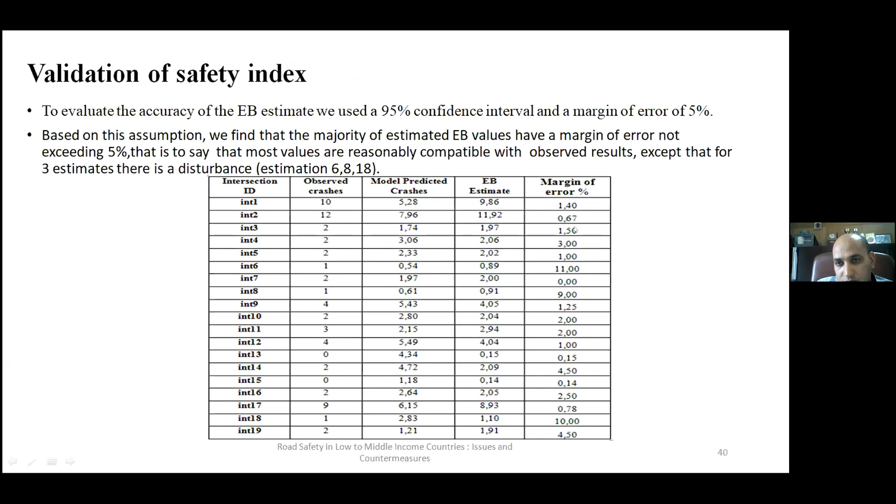We can determine the risk index and the safety index. We try to classify them, and we can then do the validation of the safety index. We can observe the differences in the crashes and also the difference in the margin of error. Then we choose what is the most dangerous intersection.

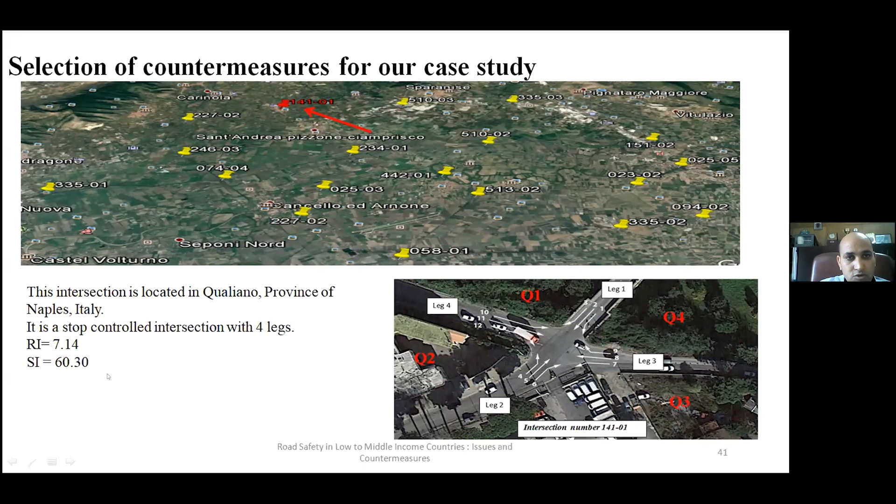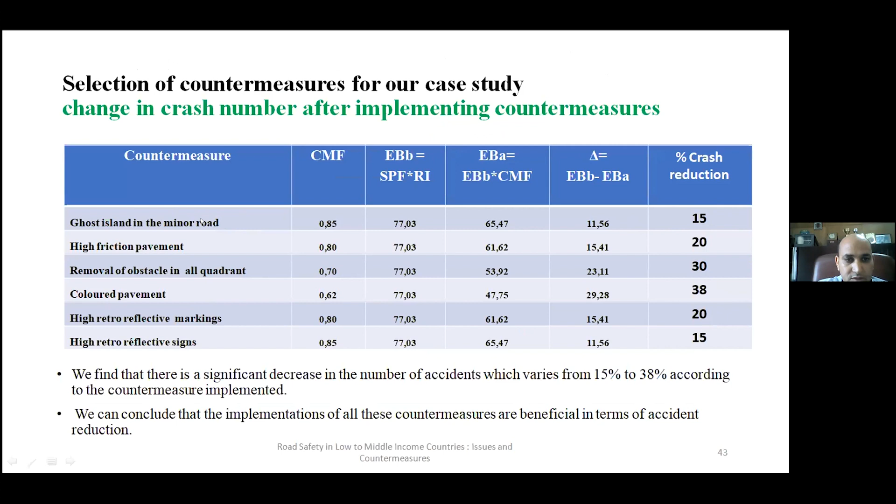And this was in Naples, Italy. And this is a selection of countermeasures of our case study, the selection criteria, the essential countermeasures, and then we choose the impact of having applied the countermeasures. For each countermeasure, we have the percentage of decreasing the number of accidents or crashes, so reducing the percentage of crashes.

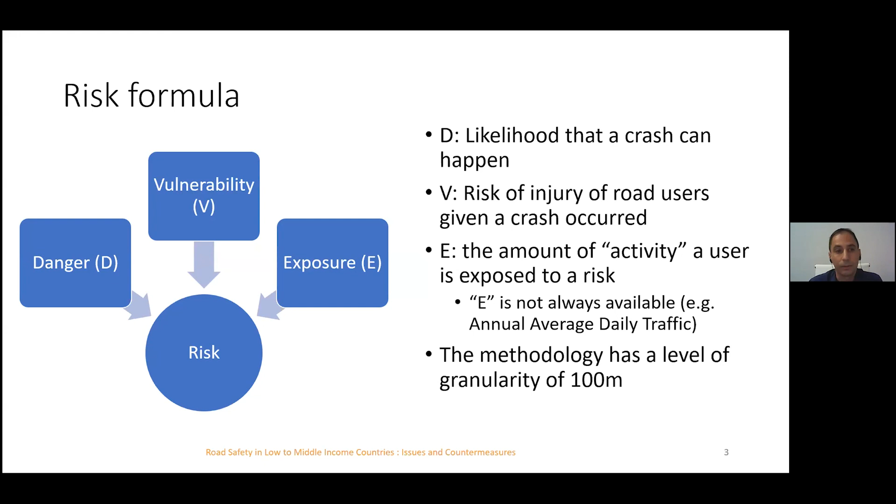The methodological framework is relatively simple. We first of all select the type of road users we want to analyze, for which we want to analyze the risk. So we divide it between pedestrians and cyclists and motor vehicles. Here under motor vehicles, you see a first, let's say, simplification where we put together the cars, the motorcycles, the trucks, different kinds of vehicles, even if we know that they have a different kind of risk.

Then when we look at the road network, we identify automatically the presence of accesses and intersections, and we calculate the danger and vulnerability both for road sections, so for 100 meter road sections, and for accesses and intersections. Then, based on the danger and vulnerability, we calculate the risk score for each road user category. We also introduced what we call the global risk score, a way to put together all the risk we identified for the road user categories.

We will give more information on this in the next slides. And then we assess some risk levels, so we transform the numbers we find for the risk into risk categories.

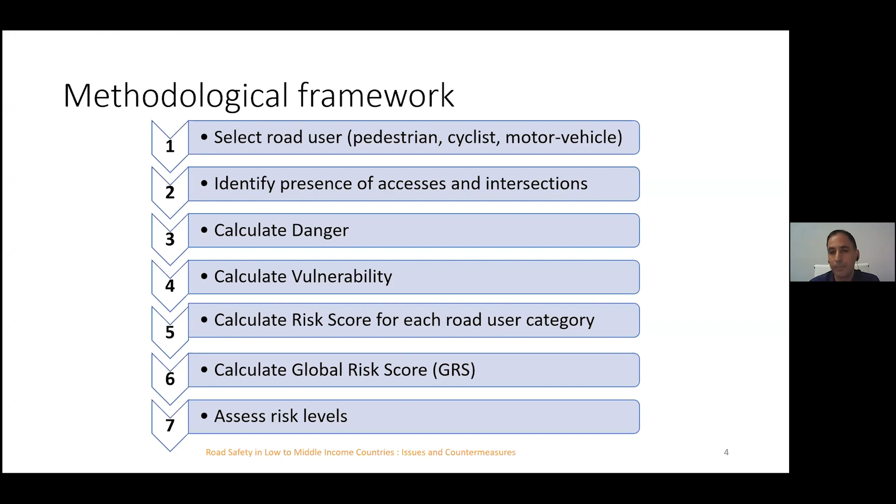To calculate danger and vulnerability, we use typically the crash modification factors, which are quite common and well known in literature. These are multiplicative factors used to compute the expected number of crashes after modifying the road characteristics. Basically, a crash modification factor higher than 1 is assumed to increase the danger or vulnerability for a given crash type.

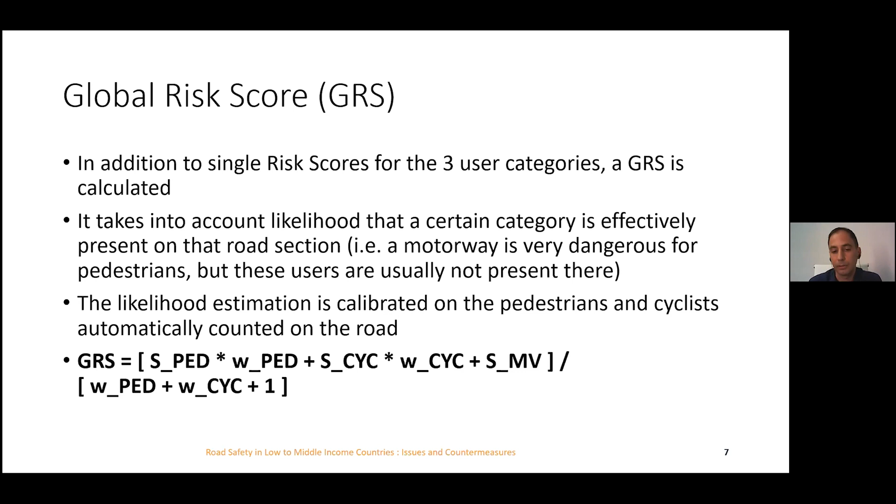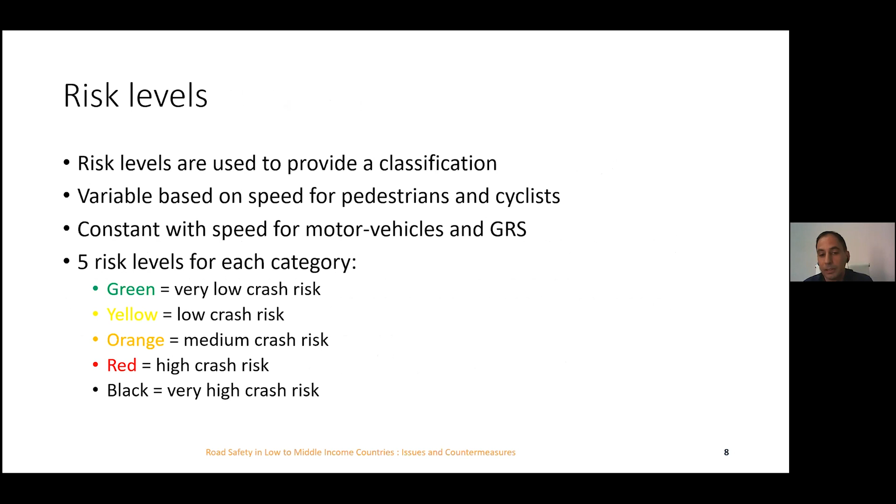Then we have transformed these risk levels for each single road user category and for the global risk score into risk levels according to 5 colors, from green to black, where green is a very low crash risk, etc. And this is, let's say, the methodological framework.

What we did is develop a small software that automatically takes as input the video to be analyzed. It also takes as input the output of the RoadLab Pro application for road surface condition, and also the manual attributes. Based on this, it automatically computes the risk on every 100 meters of road.

In addition to this, you can obtain other information. Naturally, you can see the risk for the different road users, pedestrians, cyclists, and motor vehicles. You can also obtain some summaries, especially 2 summaries. One is what we call the overall summary, which gives the road attributes coded for each 100 meter of road.

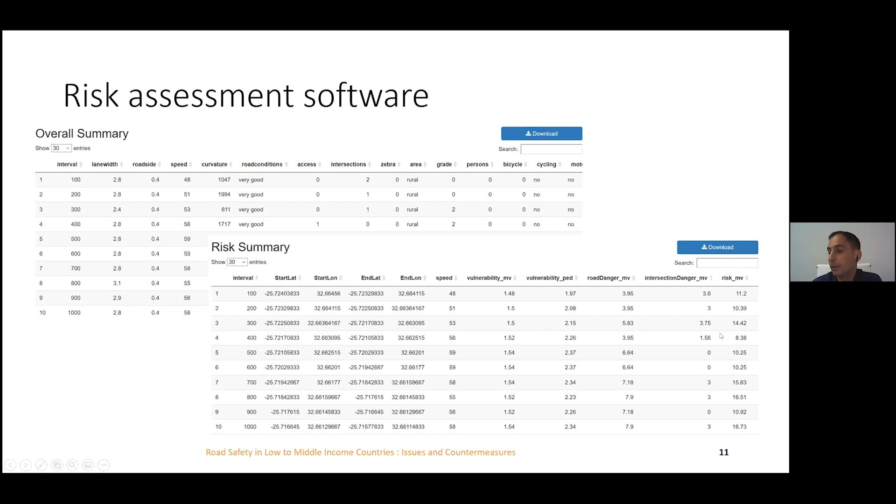So, for instance, the speed, the curvature, the road conditions, etc. This can be downloaded from the software for use with external software like Excel. And also the risk summary, where each single factor leading to the risk is calculated—so the vulnerability of motor vehicles, the danger of motor vehicles, its risk, etc., in terms of numbers. These numbers are then associated to a level of risk, as I said before.

But the question is how to perform the video filming. Since we were requested to develop something low cost, very easy to use, and very easy to find, we selected equipment available on the market at low cost. So we used a simple dash cam—in this case, the Nextbase 612.

You have to use a smartphone, usually your own, a power cable, the RoadLab Pro application, which is a freeware application, and a blank sheet.

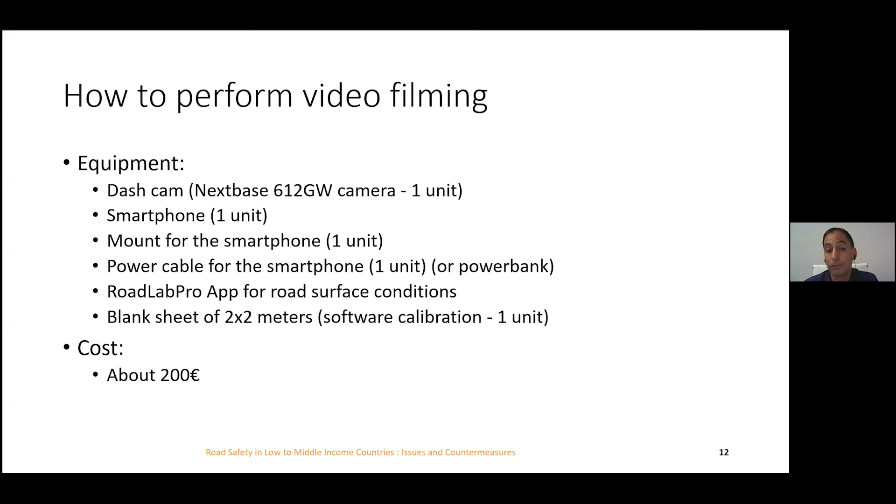This is something we use to calibrate the software. The cost of all this equipment was around 200 euros. So with 200 euros, you can go on the field, collect your information, come back to the office, input it in the software, and get your preliminary results.

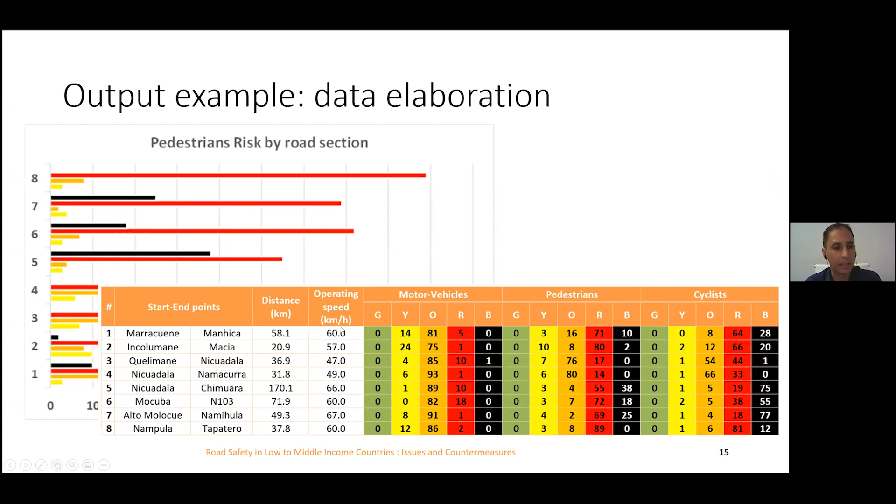Some considerations to conclude my presentation. First, as I said in the introduction, the request was to make a very simple tool for preliminary analysis. So this isn't a tool similar to IRAP, to mention the most common methodology used for risk assessment - it's another level of analysis where we want to compensate for the fact that we miss road crash information and the capabilities to make a proper, in-depth assessment like IRAP.

So if we want something very quick and low cost, to have a preliminary overview of the risk on the road, this could be a tool.

As I said before, not all road attributes can be automatically recognized with sufficient reliability and precision, at least at the time we developed the software, because IT engineering for video analysis is moving very fast nowadays, so something could have changed.

So we included only the road attributes that can be collected manually but are not highly time-consuming.

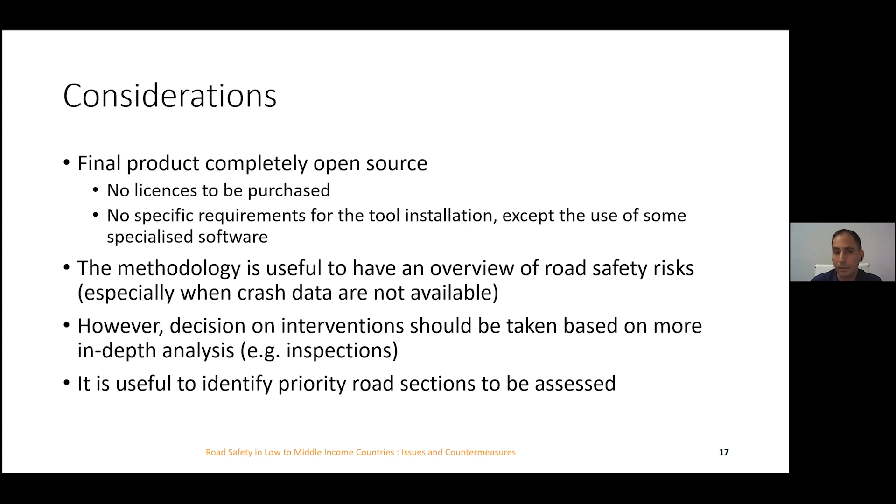But still, it's very powerful because it gives, quickly and at very low cost, some information about the risk on the road, and we find it very useful, especially in low and middle income countries. I thank you for your attention.